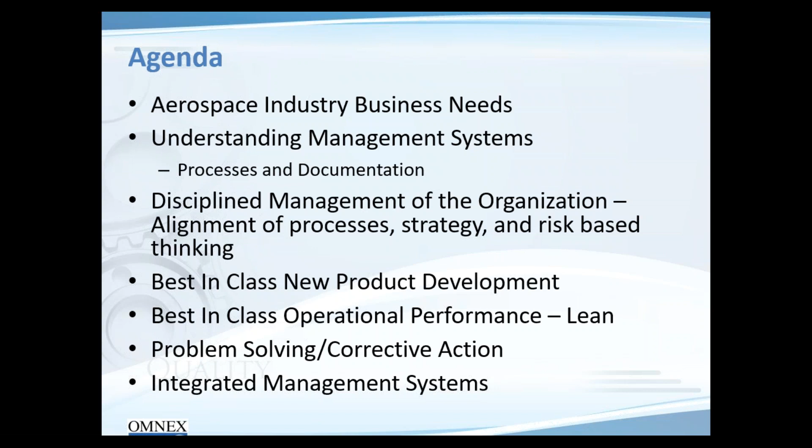And what are we talking about? Money in trillions of dollars. So we know there's a huge opportunity. Globally, more people are traveling in airplanes. We see the emerging markets come on board.

These markets in Asia, and existing markets in North America, and some really entrepreneurial and well-run airlines in the Middle East. I don't know if you all know about the Emirates - 3 different countries, Bahrain and the Emirates, and then we have Abu Dhabi, other than Dubai, all having very good airlines with great interests, which is why you see 22% growth in the Middle East.

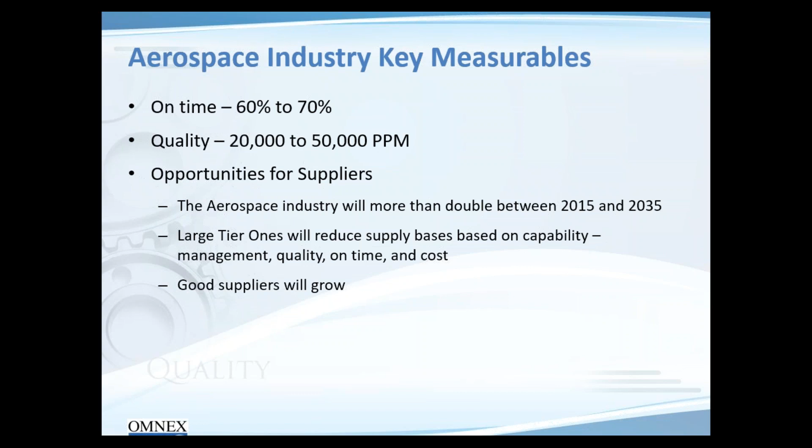And so it's a great opportunity for what we're going to be talking about, the subject of today.

If that wasn't enough, major technological advancement, along with our reliance on fossil fuel, efficiency improvements in airplanes, along with the connected aircraft, is going to make major changes happen in the OEMs, the tier 1s, and of course the suppliers.

This presentation, to a small degree, addresses this connected aircraft. But of course, the organizations we're talking about are just in the beginning of that thinking process.

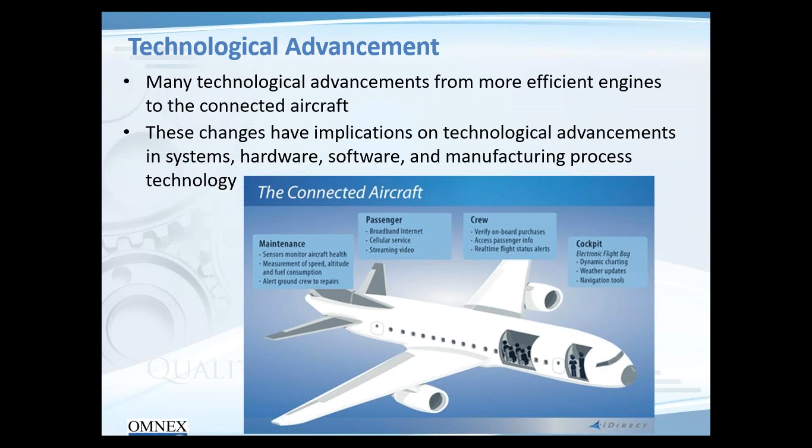So what do we recommend? Folks, looking at the audience I have today, a mixture of large tier 1s and smaller suppliers, it's very difficult for me to have a uniform set of suggestions. Suffice it to say, these are what we thought are common requirements for the aerospace industry. Working with any one of you, this will be tweaked to your situation.

So here are the 8: process, approach, and documentation. Maybe you've all grown tired of me talking about this, but this is key. Tied to this is documentation - what should we do about it? Is it more documentation we need, or less documentation we need?

Second, something I really haven't talked about, very near and dear. I've just come off meetings with a large tier 1, and reflecting on all the suppliers of this tier 1 that we have visited, it is really important - bullet number 2 becomes really important.

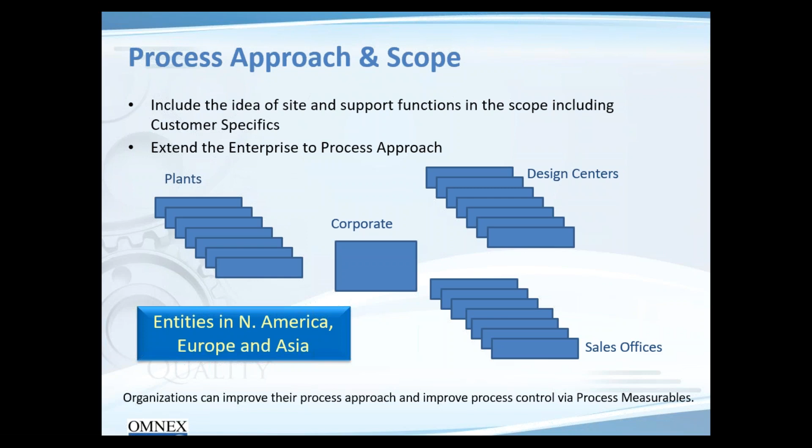So some of you are looking like this, but many of you in the audience today are very simple 1 or 2 plant operations, so maybe it doesn't extend. So the point we have to make here is that processes are not for one site. Processes link the enterprise. These processes that link between corporate, the plant, the design center, and the sales, we call enterprise processes, for those of you who are part of an enterprise.

So if you have read my book and looked at some of the other presentations I've made, I have said there are enterprise processes and site processes. Enterprise processes are global processes, whereas the site processes are standardized between sites, but we are much more focused on either the sales or the design center or the plant.

Now, one very important part of designing a good management system is to have a good picture of your processes, sequence, and interaction, sometimes called a process map. This process map then needs to be documented. Folks, you don't have to replace all your documentation, but the ones which you're doing new, try not to over-document.

Have it as a 1, 2, 3-page process flow, and it has the who on the left-hand side with responsibility, the what in the flow, and the when in the flow, all right? The how is always a work instruction that you can have if you really need it. I won't go into when you would need it, but let's just stick to level 1, the manual, and level 2. As you know, in AS9100, a quality manual is not required, but a certain set of documents that they say could be collectively called the quality manual is still required.

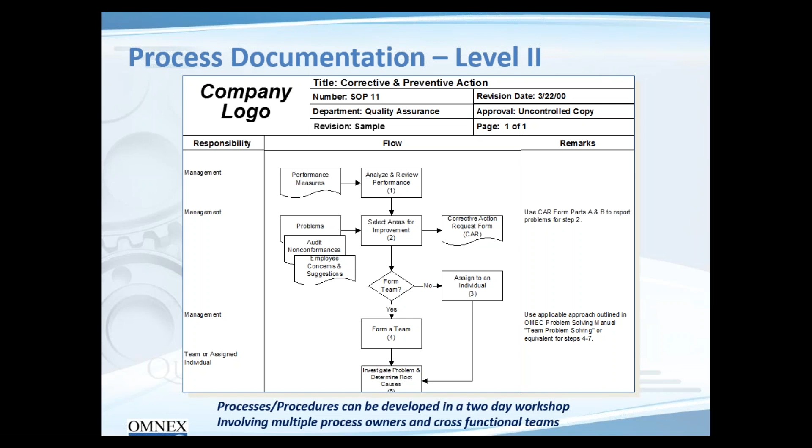I am actually part of TC176 defining the quality management systems documentation, ISO 10013. Let me just say, just because a standard doesn't require something, you can continue having a manual, and of course, processes. I'm not going to have a chance today, there's so many different things I want to talk to you about, to continue on and talk to you about the pyramid of level 1, level 2, level 3, level 4, and what I think are best in class in everyone.

Let me just summarize this topic and move on from our first strategy: there should be only one quality manual. Addendums can be added to explain processes or process maps in locations and to show who is a process owner. Number 2, processes should be company-wide, that's the enterprise we talked about, and local site processes. Those of you who have just 2 or 3 plants, with one of the plants having the corporate, can just have standardized processes globally for all of them.

Work instructions should be reduced by looking at process and product families on the shop floor. So if you have the same process family or same machines in processes in multiple facilities, please have the same FMEA, control plan, work instructions, forms and checklists to standardize process control. Now, of course, forms should be in the hundreds and should be standardized globally.

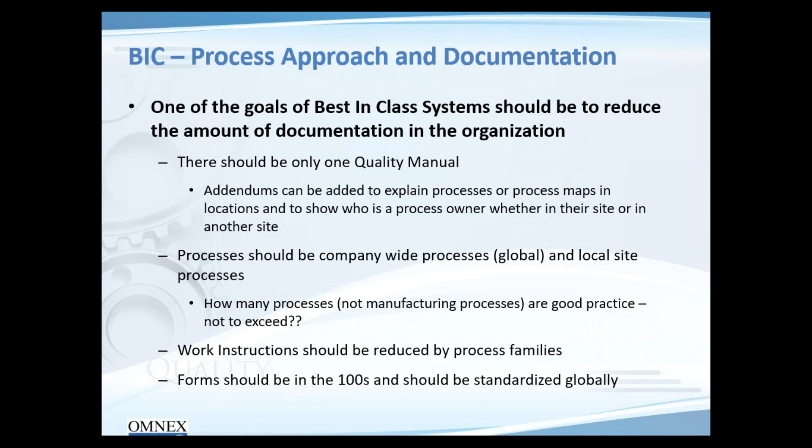Moving on to our second topic, I feel remiss that I have not spent more time discussing this.

This alignment of processes, strategy, and risk-based thinking that we call the business operating system at Omnex comes off methodology we wrote for Ford Motor Company in the 1990s. Then we continued training not only the OEM, but also training all the major suppliers to this day who have an operating system that top management takes ownership of. So leadership then needs to really, really understand they own the management system. And the start of that is this process that we call the business operating system.

I'll just tell you this, we updated the business operating system ever so slightly because the BOS was an incredible methodology. We went from customer focus to interested party focus, mission, vision, policies, which are always there, and the context, which was not explicit, but which is always there. And the whole idea is this planning in 6.1, which becomes the goals and objectives, is supported by KPIs, or as Ford called it, key measurables, supported by processes from your process map and process measurables, also required by AS9100.

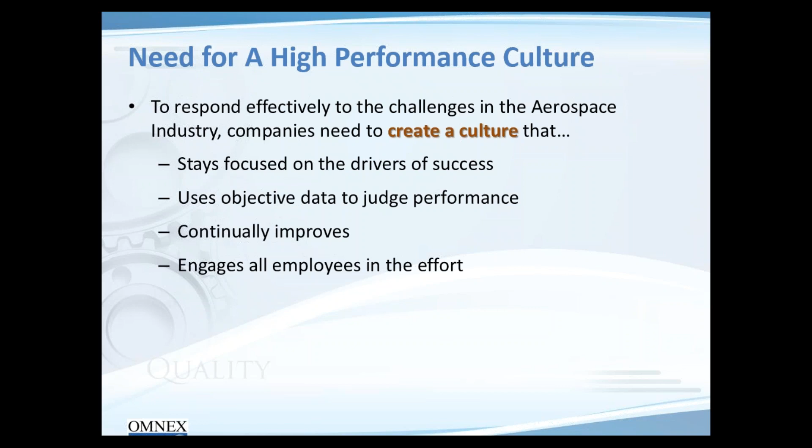So a few more thoughts on what we need to talk about. The challenges we talked about require a culture that stays focused on the drivers of success, uses objective data to judge performance, where top management understands they drive continual improvement, and where they are engaging all employees in that effort.

Key features of BOS: leadership and management commitment, organizational context and customer focus, risk-based thinking, process focus, and many more. I could continue, but that would mean I haven't allowed enough time to talk about BOS, but just to tell you, it's a vital process.

I'll tell you the rest of what I wanted to focus on. Number one, it introduces the idea that results are cross-functional. What does that mean? It means PPM is not quality's job, it's a cross-functional job. Delivery is not the shipping department's job, it's a cross-functional job. I could tell you a couple of different stories to illuminate this idea of cross-functionality, but it's key to understand for the business operating system architecture that results are driven by processes.

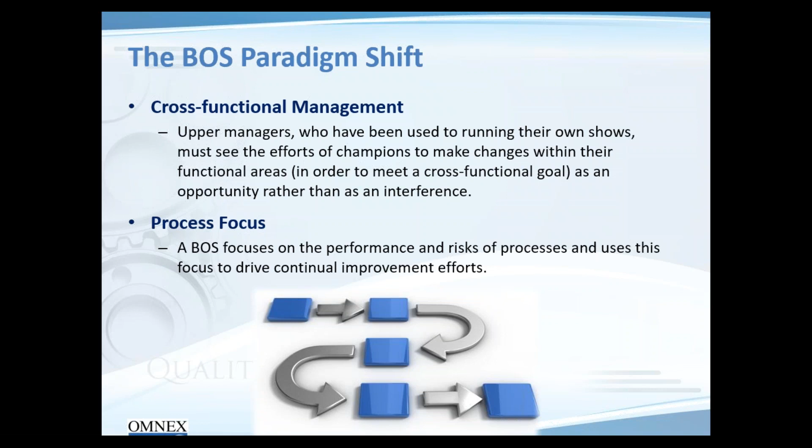You cannot drive results, you can drive processes. That's how you get process focus, with champions understanding they champion at the very senior management level. The key enterprise processes are managed by these champions.

Another thing BOS drives is the idea of visual management, a single way throughout the company to measure yourself, where you are, and your goal. Pareto diagrams to identify what to improve, and then the improvement is always based on what needs to drive the needle.

Which I didn't mention, top management then has cross-functional teams working on cross-functional initiatives, and Kaizen teams working on the small improvements and the breakthrough improvements. Of course, Kaizen is both.

This idea of the management team, a cross-functional team of top management - sometimes we call them a steering committee, sometimes a leadership committee - looking at KPIs, taught that they need to meet monthly, and that the meeting needs to be improvement-oriented.

It's not the quality manager's job or somebody else's job to put together the KPI. The KPIs are brought together by champions who own the KPIs, including the closing the gap activities. The meeting is improvement-oriented and is about removing roadblocks and closing the gap.

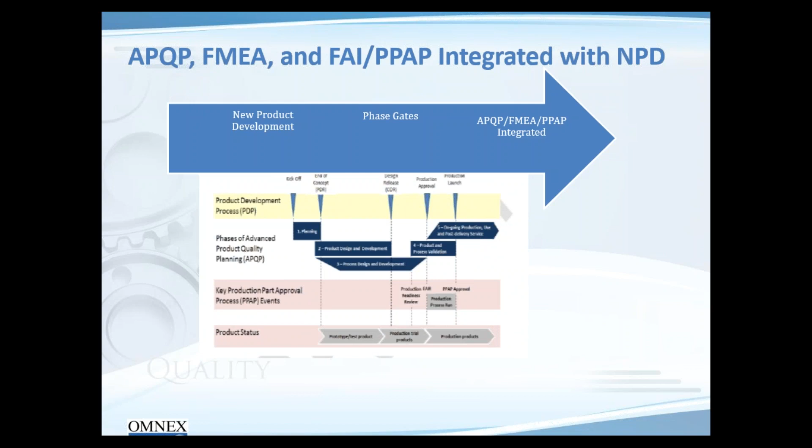Here's a picture of the APQP with the PPAP process at the very end from AS9145 - the all-important FMEAs, which are linked, and the PPAP that comes from the different phases of APQP. Folks, again, many of you are just doing PPAP while forgetting APQP. Don't make the same mistakes that we took years to learn in other industries.

Purchasing and quality cannot ask for the PPAP at the very end of the launch of the supplier. If you do it like that, it'll just become a paperwork affair. I did a best-in-class presentation for the AAQG maybe a year or two ago. Feel free to email us for a copy of this best-in-class APQP and PPAP. We did that before AS9145 came out.

And talking about our experiences in the aerospace industry, of course, we're on the writing committees of many of these standards in AIAG and automotive, and have had experience since the mid to late 80s implementing these.

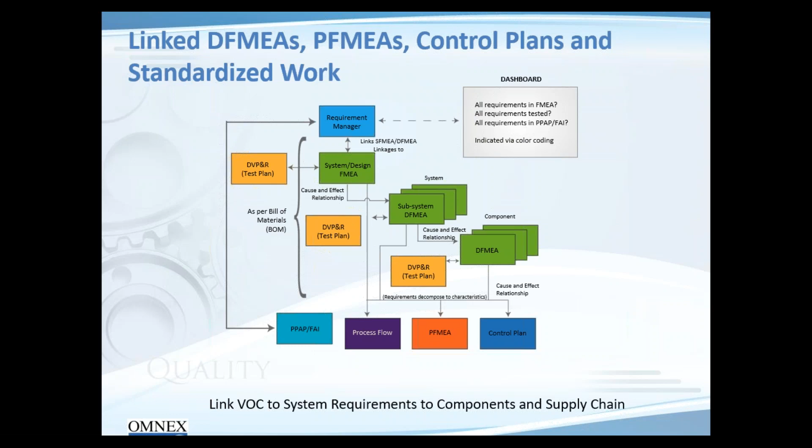Folks, big ideas - this is what I'll offer you in this webinar. Each of these could be a webinar of its own. I'll be happy to talk more about this for each of your individual organizations.

And then, folks, don't forget - actually, we should be talking about the 8D, updating the FMEA, right? Going from after the 8D is done, you need to go back into the FMEA, and this should be whether it is supplier issues, internal issues, or external issues. This FMEA is your lessons learned for your next implementation.

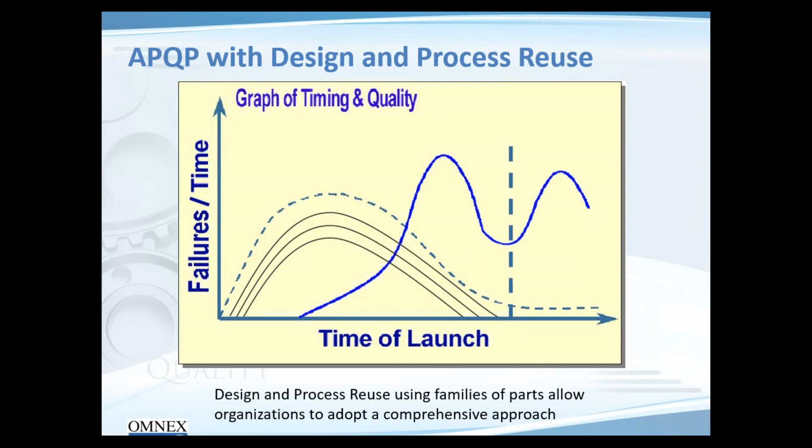This is what we have learned in the last 20 to 25 years of implementation of APQP, FMEAs, control plans, and so on: that the cost of advanced quality planning, the dotted line, can come down. Do you see those curves? How does it come down? By design and process reuse using a family of parts and processes approach. Of course, the only way to do this effectively is with software.

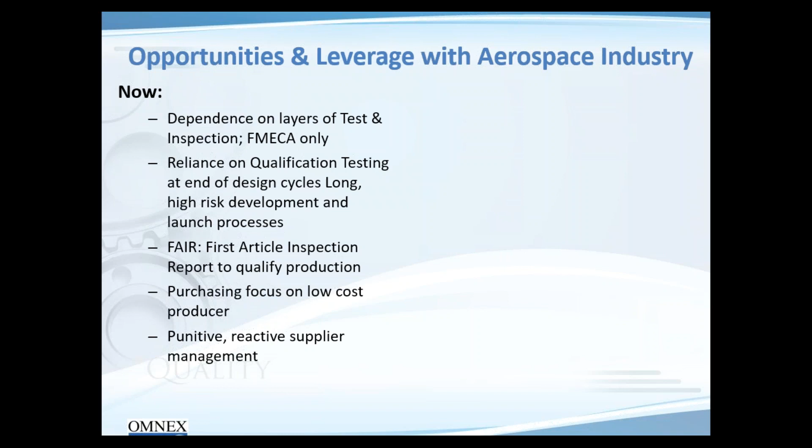Before I go on to my last slide, this is a slide set that one of our consultants who does a lot of work in the aerospace industry, Dave Watkins, put together for an internal Omnex meeting. This is what he said is happening today in the aerospace industry on the left-hand side.

The dependence is not on FMEA, but on layers of test and inspection. Reliance on qualification testing at end of long design cycles. First article that only looks at a dimensional report. Purchasing focused on low cost. Purchasing and quality being separated when dealing with suppliers, which means when one tries to do an initiative, it's not supported by the purchasing decision. Punitive, reactive supplier management, and then lastly, which is not on here, which we very well know: multiple big, large customer departments all making demands of the supplier, often which may be in conflict with each other.

And so the industry then moves to the right, needs to move to the right-hand side with the risk analysis and the prevention coming from FMEA and process control, adopting preventive design processes early, implementing AS9145 with the APQP and PPAP. But folks, the devil is in the details. So if you want to really get the benefit of AS9100D, you need to understand what you really need to do when you implement that.

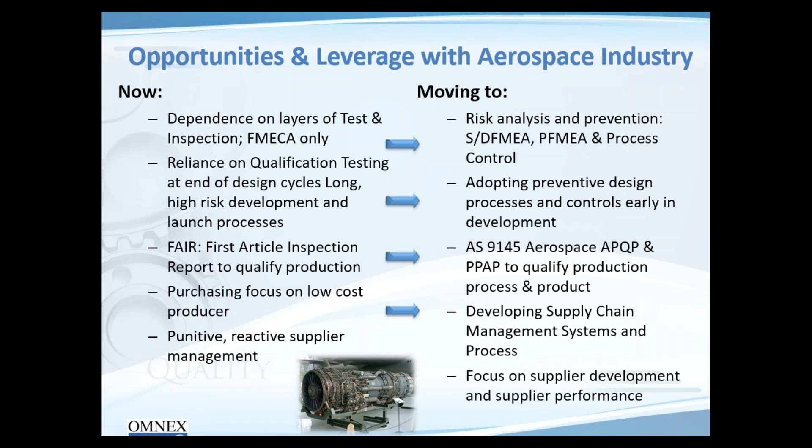Developing supply chain management systems and processes and focusing on supplier development and supplier performance. And as I mentioned to you, good suppliers then need to first understand why they're doing it. There's a whole mentality of 'I'm doing it only if it's in the purchase order' in the aerospace industry. And really, to a large degree, other industries have overcome that. The aerospace industry also needs to understand these initiatives that I'm talking to you about, these 8 strategies - it's not for your customer, it's for your survival.

So, in summary of this AS9100, 9145, APQP and PPAP: these processes are almost impossible to conduct via spreadsheets. You need to have electronic e-processes that help you provide the linkages we showed you in the picture and to institutionalize the system. Along with software systems, which means web-based enabled e-processes, there needs to be training, not just for the engineering community, but top management to understand they are implementing a key strategy for the organization. Engineering, purchasing, quality.

And let me tell you this: these methods will drive quality in the organization. Again, you need a good management system. You need to have BOS implemented because you've got to get your leadership in a culture change. Third is AS9145 and 8D. That's where we are in terms of what we're talking to you about. These systems are guaranteed to drive a low PPM inside your organization.

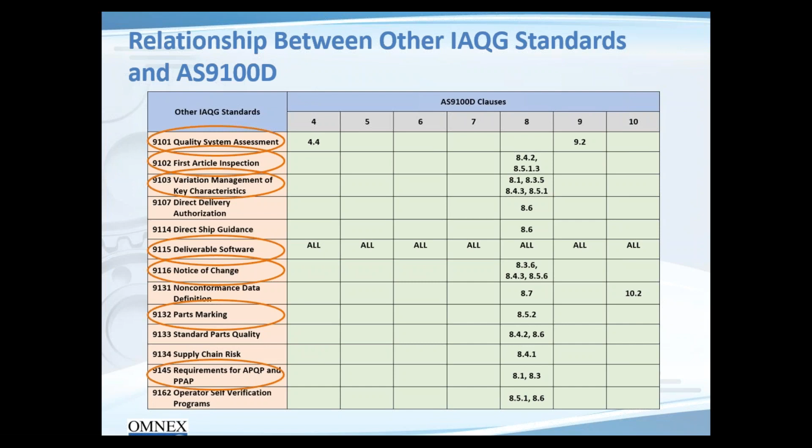And folks, all these other ones are also good, but these you should not miss. You need to integrate that into your AS9100. That's all I really have a chance to talk to you about in this 1-hour webinar in terms of the integration of these standards.

Let's move on to the next topic: operational performance excellence. This is the Omnex methodology for operational excellence, includes Lean Six Sigma, removing waste, optimizing targets, reducing variation. We've had a lot of experience helping large organizations get to parts per billion. This is where our customers are today. Whole industries are making big improvements, and we did it without Six Sigma.

I think Six Sigma is very important, but it need not be the strategy of today. You have lower hanging fruits that just disciplined problem solving will fix, and there's only so much you can do. Implement lean, because you absolutely need to lean out your organization. Plus, these are some important standards for your customers on top of it. But I'm putting it in because it's important to your survival.

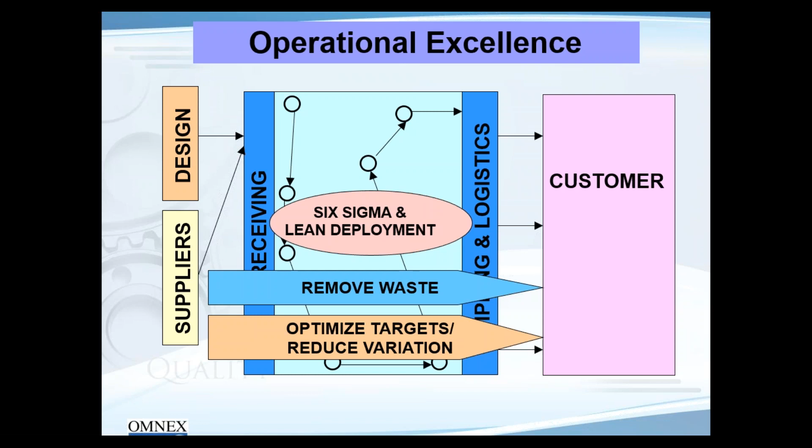An increase in inventory means more issues in the organization. Reduction of inventory really means we are getting rid of these problems.

This was always something that really intrigued me, and maybe you all have seen these. When you look at the time, the speed of how long parts stay in our plant should be one of our measurables for lean. We cannot have more than about 12 to 18 different key metrics, or it will just overwhelm what top management needs to look at. Maybe this does percolate up to a top management key measurable: how long things take inside our plant, how much of it is value added, meaning the product is actually being transformed, other than non-value added, where it's waiting for a machine, being inspected, transported, setup time, and so on.

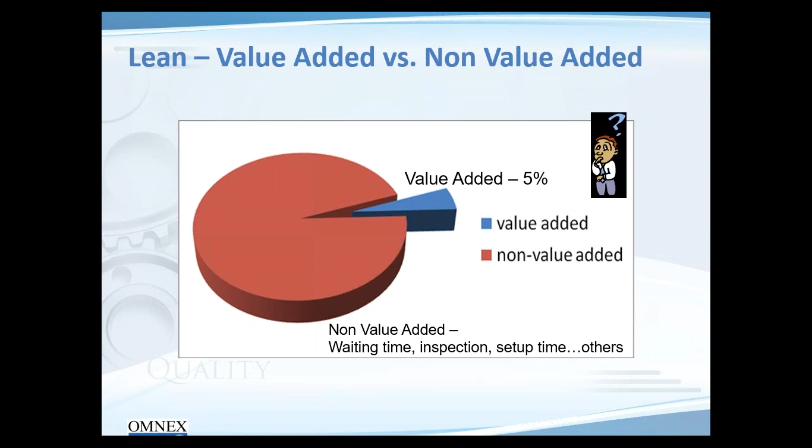So 95% non-value added is typical. So really then, what we have to be spending time on is getting rid of all this waste. And again, we shall continue because we could spend hours on each of these topics.

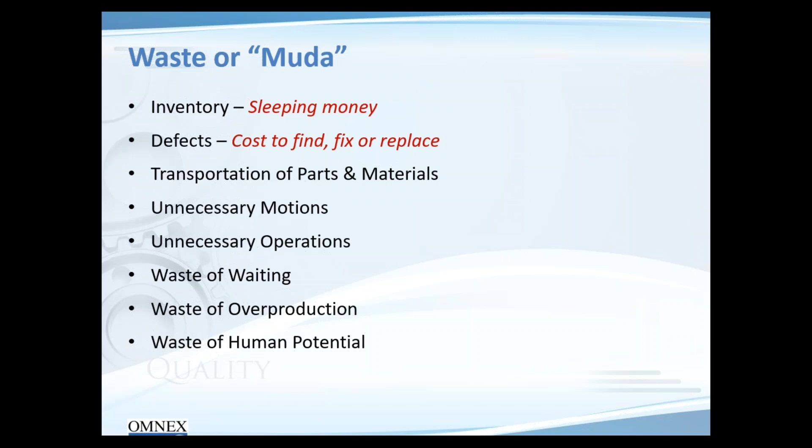Something we believe deeply in, that we have been implementing since the 1980s, is disciplined problem solving. Here you see the 8D process. Of course, we don't care what process you implement. They all have defined the problem, containment, root cause, and of course root cause needs to be 3 different types: escape, occur, system, and then corrective action and preventive action.

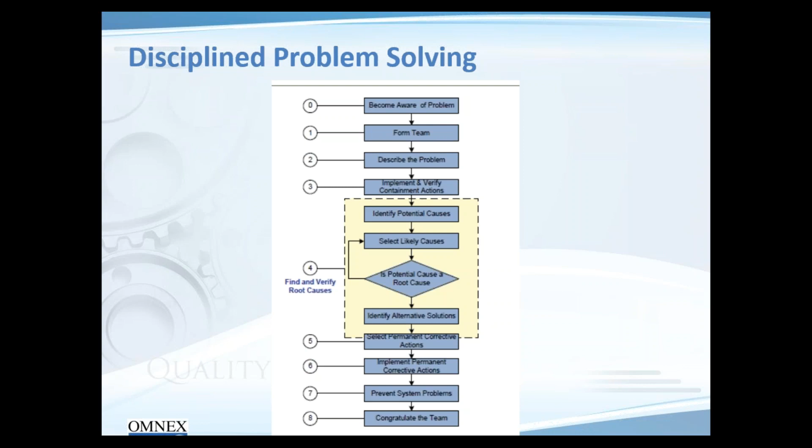Recently, we were part of a cross-functional, industry-led team updating the 8D into effective problem solving, linking the FMEA very closely with the problem solving.

Folks, so I leave some time for questions. Let me pause here, giving you a chance to ask questions you may have.